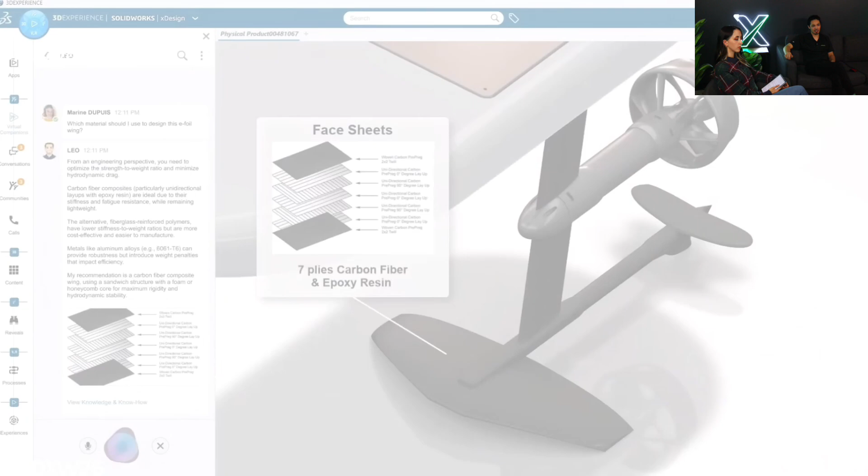Whereas if you ask Leo the same question, what material I should use for this design, he'll give you the engineering reason why carbon fiber might be the ideal choice here. And then let's take a look at what Marie would say. Well, she might give you a suggestion based on the different material science perspective, right? So once again, the regulatory and the science background.

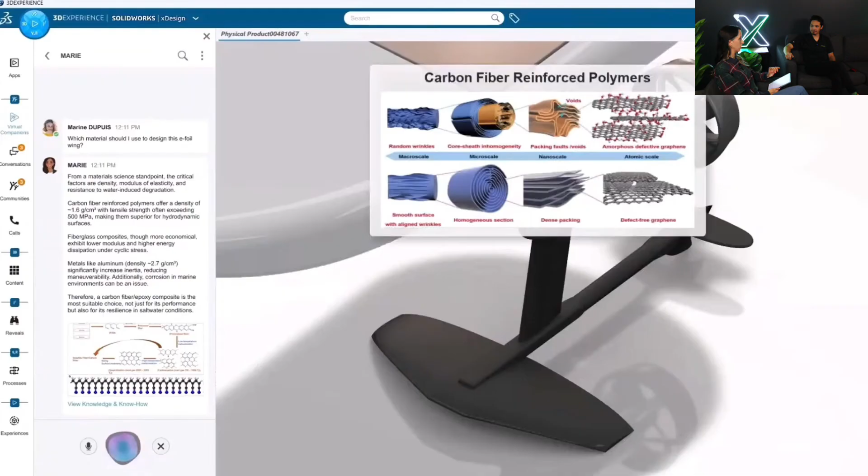Okay, that's interesting. So they all have a very specific role. Exactly, yeah. So we were actually very lucky at 3DEXPERIENCE World 2026. We had the opportunity to watch a live demo of Leo. So I absolutely have to share that with you guys here because just this 2-minute clip is very impressive. So let's give that a shot.

Leo, could you please create a sketch from this drawing? Okay, so first one, I have it in my clipboard. I have a drawing. Can you extract sketches out of it? And by the way, I pasted it very fast, so some people will say that this is a video, so I'm deleting text, okay, out of it, right?

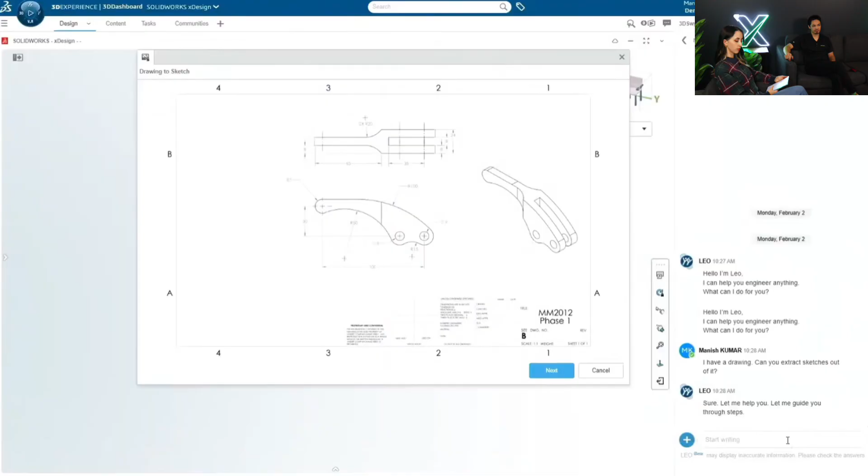And I am pressing enter. Because yesterday while I was doing it, some people were confused. So here, it asks me that, sure, let me help you, let me guide you through steps. And it pops up something called drawing to sketch, select a PDF file. Okay, so let's try to select a PDF file. So in ModelMania, as you know, you have to have a PDF file that we give you, and then you have to use that in order to create the model.

So here, you can see that what AI is doing here is that it is looking at that PDF file, and it is providing segments that it wants to keep as sketches, segments that should not really be sketches. So there is a title block, there is an isometric view that it shouldn't really keep as sketches. So it is discarding it.

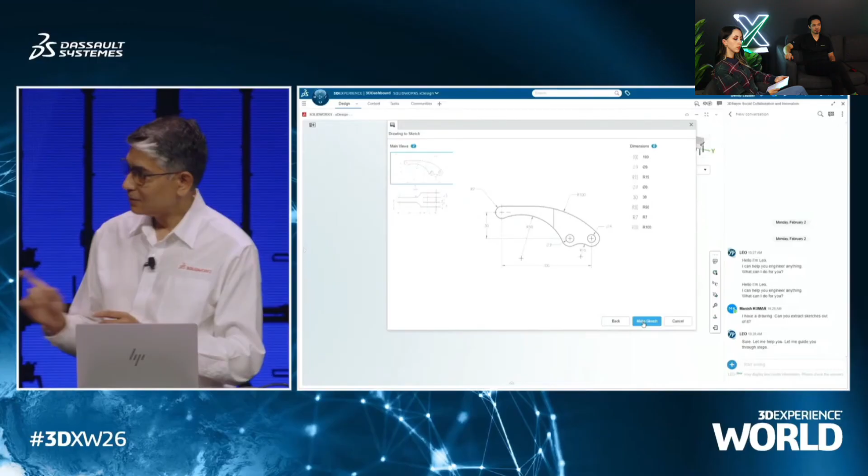Not only that, Pascal, it read every single dimension. So this is also done by AI. You mean all the dimensions? All the dimensions, and I can even modify it if I want. You see, these dimensions are editable. But here, for the sake of time, let me just try to create a sketch. So I was able to go from a drawing to a sketch like this. Wow.

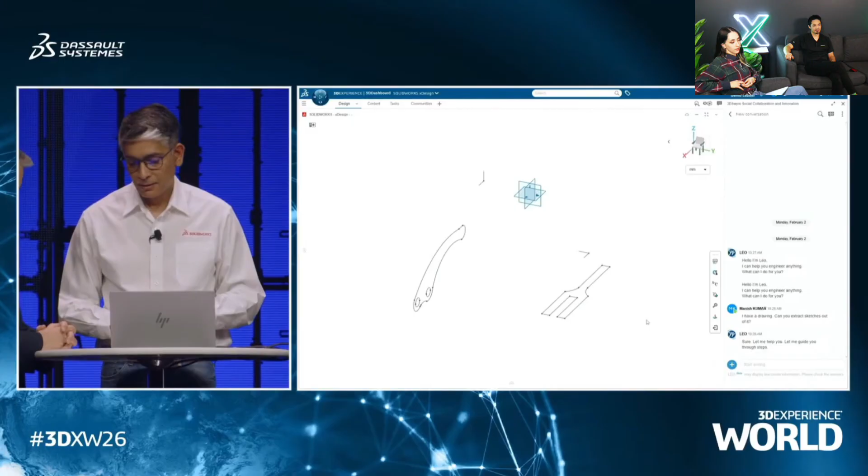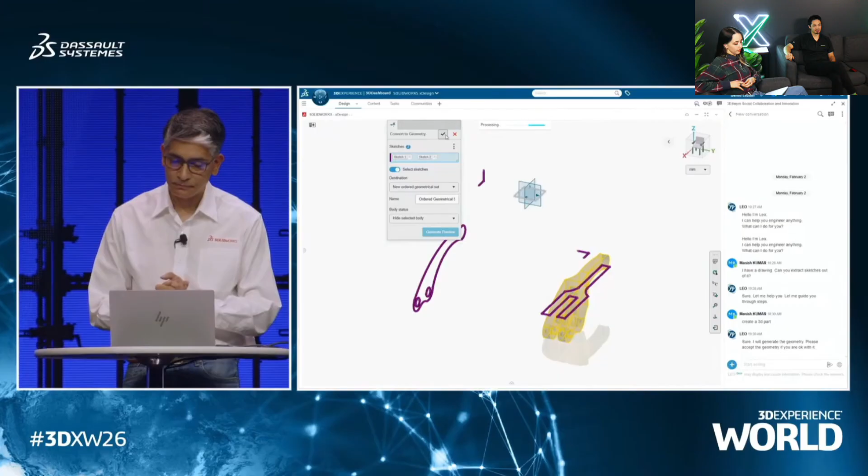Now, what about the 3D parts? You want more? Yes. So create a 3D part. Now let's see what it does. Actually, what it will do is that it will identify the sketches and it will know how to create a 3D part out of those sketches. Soon enough, it will show me a preview of the model that I need to have. And once the preview is shown, I'll hit OK, I accept it, and there you go, you have the 3D model. There. Whoa.

Yeah, I mean, that's it, right? Very impressive. So this gives you an idea of sort of what's to come, right? With the engineer in the driver's seat, AI became a tool that made designing feel frictionless. So this is not a sort of magic design button. It's about removing friction, as you said, improving context, and mostly supporting engineering decisions. It's not replacing expertise, it's just enhancing it, which is great.

That's exactly right. So one thing that we noticed as Solidxperts was how grounding that messaging actually felt. Right? It's not about blowing up existing workflows. It's really about strengthening what engineers are already doing on their day-to-day. So if we were to sum up day one in a core message here, I would go with: AI is the engine, you are the driver. So once again, AI works with engineers, not instead of them.

So that sort of brings us into day two, which was more about partnerships and what AI looks like today in practice. So the tools that we have at our disposal today, let's take a look at another clip.

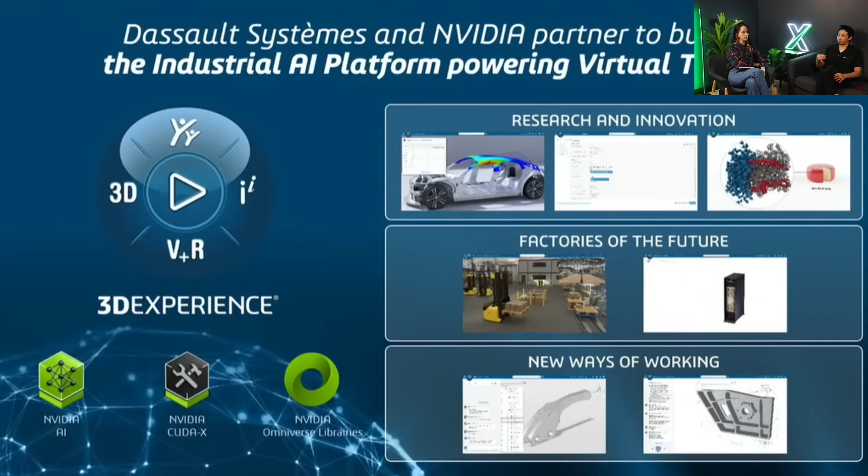So imagine the scale of the simulation that we're talking about here. It's really the capability of simulating an AI factory that's going to be possible with NVIDIA GPUs combined with the 3DEXPERIENCE platform.

I mean, it all sounds great, but the key question for me is, where does AI actually show up inside a real workflow? Not in a staged demo, but in your daily engineering work, for example.

Yeah, so today we have AIs integrated in SOLIDWORKS that assist us in multiple practical ways. I'm going to call them AIs, but they're really just things like automated feature recognition, suggestions for optimal design configuration based on prior models, or even predictive simulation guidance. These are all things that exist today, and they're more like AI assistants. They are not autonomous on their own.

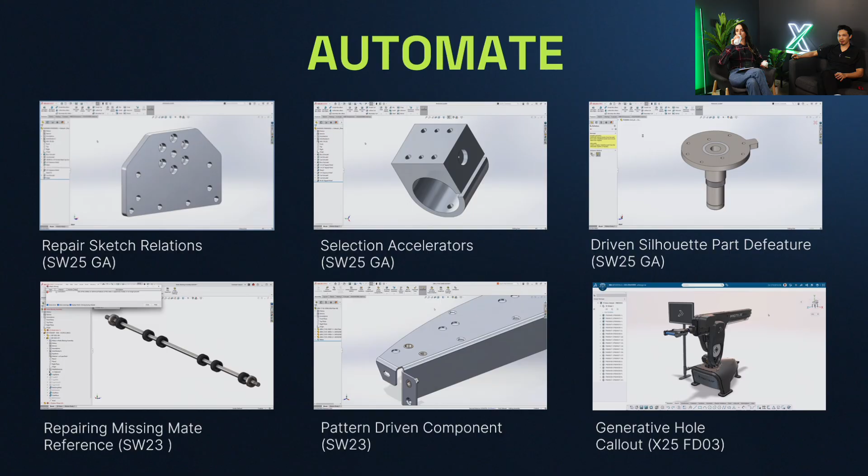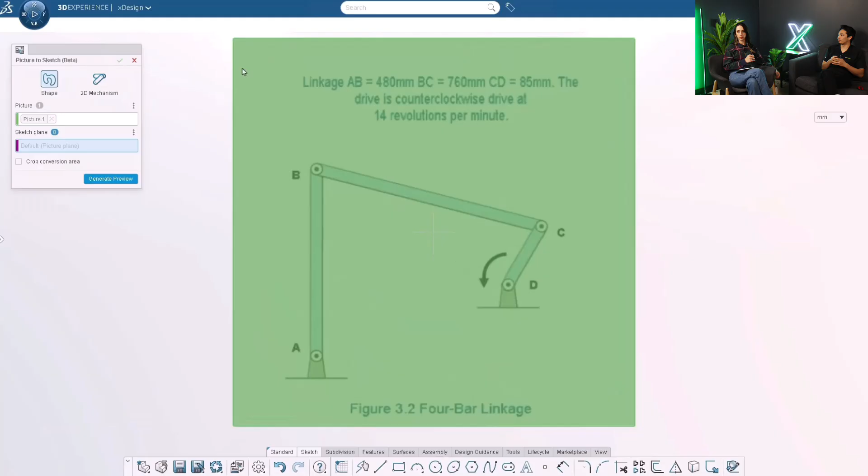I'll present those really quickly. The first one, that I think is really cool and something I wish I had as a student, is the ability to take an image of a mechanism, just a picture, and have it become usable design data. Imagine you have this image from a school textbook of a mechanism, and you want to create that in 3D in a modeling software. Now you can just grab that picture, import it into your design environment, and right from there create a mechanism with all the right constraints. So from idea on paper to a functional sketch online in seconds.

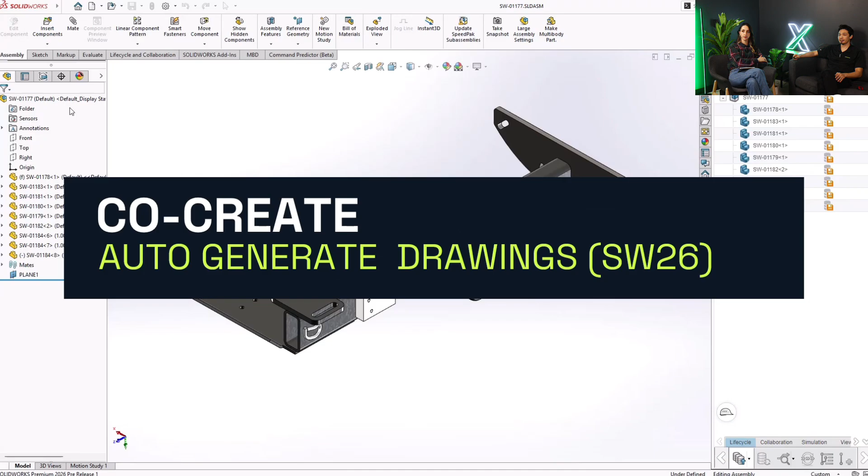The second one I really enjoy, something we should definitely take advantage of today, is the ability to auto-generate drawings. Generative AI takes the pain out of creating your detailed drawings in SolidWorks, automatically generating and detailing your new drawings. Imagine your dimensions, your tolerances, your callouts for features, all included in a drawing that's automatically generated by an AI assistant in SolidWorks.

So we are not replacing CAD, we're just making it stronger. AI becomes another tool in the toolbox we already have, alongside experience, intuition, and engineering judgment. Tools get smarter with time, but engineers stay firmly in control, and I think that's an important distinction.

Yeah, for sure. So the big message for day 2 is to build on the foundation that you already have. Take advantage of SolidWorks with cloud services because it is your gateway to the future. All of the AI we'll have in the future is going to be on the 3DEXPERIENCE platform, and you're going to need SolidWorks with cloud services to gain that access. So if day 1 was a teaser of what's to come, day 2's big message is a reminder of everything you can already do with AI today.

So that brings us to day 3, which was really all about community.

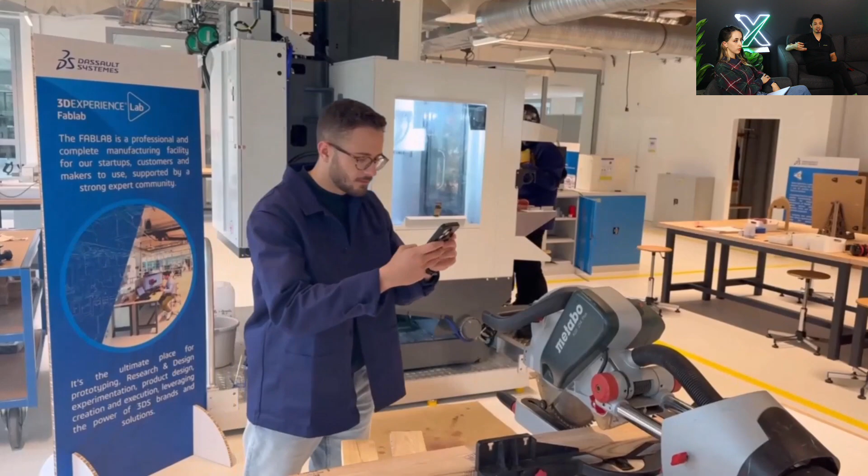Don't worry though, SolidWorks isn't going anywhere. It's just evolving into a more connected, smarter, and easier to adopt tool. So once again, I'm going to steal some slides from our last presentation just to give you an idea of what's coming. So imagine you need a 3D model of a part, like a handle for your assembly.

With just a picture, AI will be able to generate a precise virtual twin in seconds. And then this model will come in simulation ready, which will allow AI to run even further tests under your real-world stresses, your real-world conditions. So your performance is being validated right away.

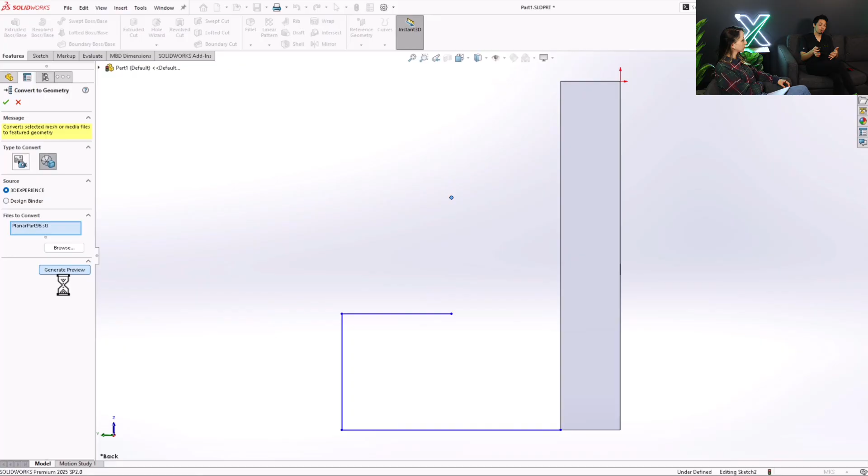Not only that, picture to mesh is a very powerful tool that is existing today, but what if you needed to take that mesh further? Well, in the future, what we'll have is something called Mesh to 3D, which will take those static meshes and make them fully editable parametric models.

So whether it's from a scan or an import or old legacy data, AI can open a direct path from that complex geometry to features that you'll be able to refine, reuse, and evolve. So we're exploring multiple approaches, and you can see here one of those results.

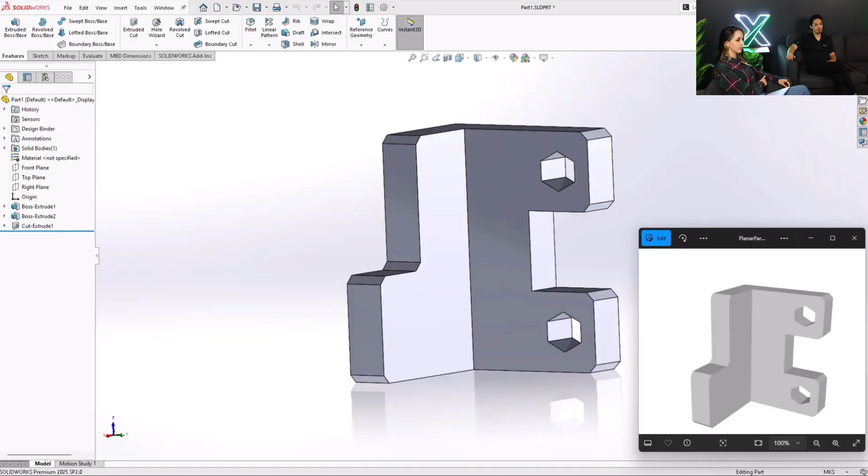Now imagine that you're moving from a 3D part into sketching some new ideas. You already have the part and you want to add on top of that. Well, instead of painstakingly constraining every line in a sketch, once again, generative AI steps in. They'll be able to help you stack your dimensions, recognize existing features, and ask you if you want to recreate those. So keeping your design intent intact while you're focusing on being creative, being innovative.

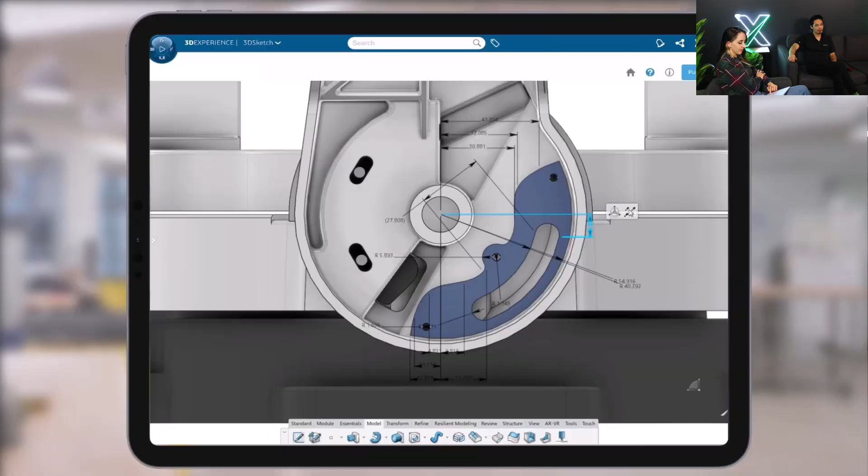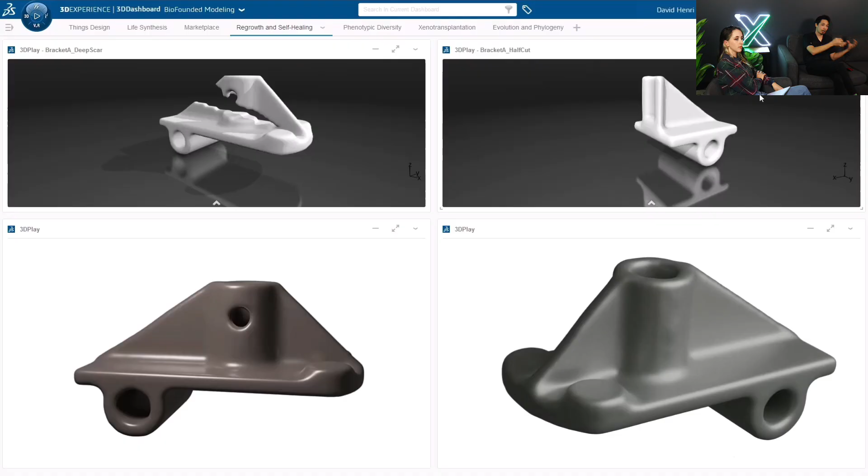This one speaks a lot to people that work with scanning, right? So if you do any scanning or importing of parts, they often come in incomplete, maybe with some gaps or missing features. Well, AI in the future will act like a self-healing material for our geometry, automatically recognizing patterns and rebuilding those missing areas that didn't come in with your scan. So AI helping you restore your design intent in this case.

If you do any sort of manufacturing, in the future, NC programming will become fully generative. AI won't just automate your toolpath creation, it's going to explore alternate strategies, different ways, maybe balancing your speed and your quality, and continuously learning from past jobs.

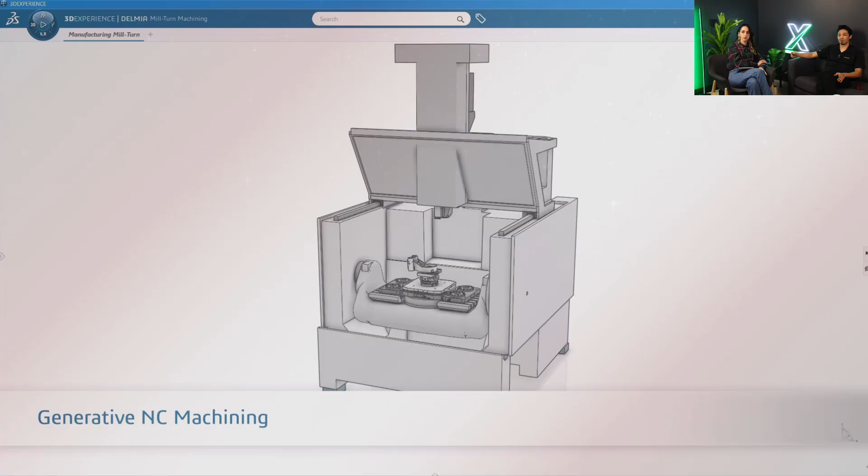Let's say you're a graphic designer, for example. You can actually accelerate those rendering workflows in SolidWorks in the future. So imagine you have a camper van and you want to see what it looks like in real life. Just ask your AI chatbot in the SolidWorks interface, hey, can you render this and tell me what it looks like in real life, basically? Wow. So the future of visualization is with AI.

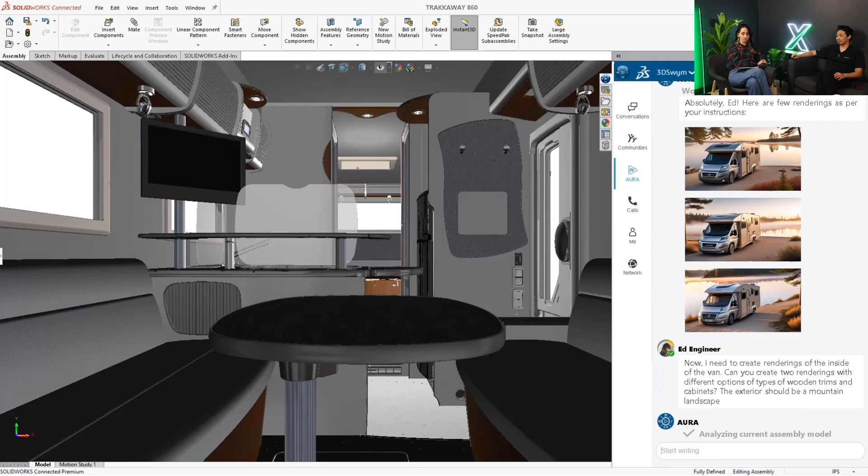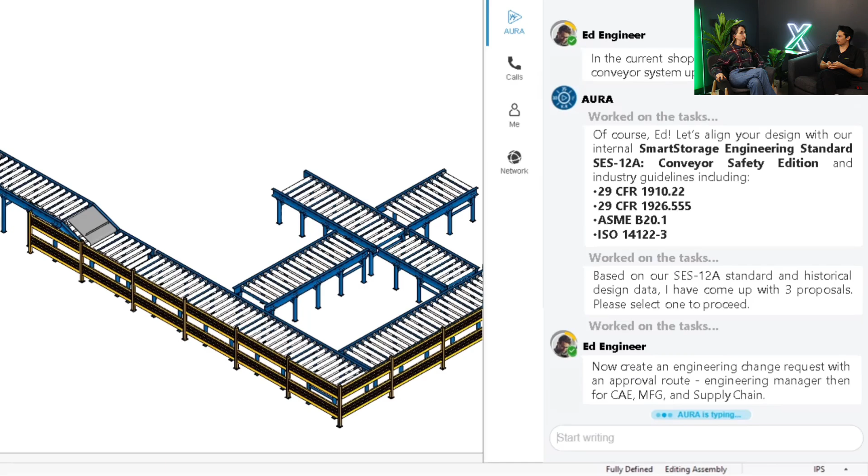And then this last clip I want to show you, we already know about Aura. Aura already knows about our models, right? It understands our models in context, and they're able to give us some deeper answers, even maybe providing design options or different configurations based on all of the knowledge that we've given it. So once again, AI-assisted workflow with a co-pilot, sort of.

Okay, so what I take from day 3 is that technology evolves, but the real investment is still in people. So tools matter, but skills matter more, thankfully. Yes, thankfully.

Okay, let's bring this home. I am going to cosplay as a SolidWorks user watching this today and ask questions about what I should actually take away. So I'm going to rapid fire this, okay? Perfect. Okay, first question. What's the biggest misconception about AI coming out of this event?

I would say the biggest misconception is definitely that AI is supposed to be a replacement for engineers. It's not. It will not be. These assistants we've talked about today are really designed to enhance your decision making, reduce your repetitive work, and give you actionable insights. Once again, you're still responsible for the final design as the engineer. We're thinking assistive, not autonomous. Engineers are always going to remain accountable.

Okay. Second question. Does cloud mean all in or nothing? Is desktop SolidWorks going away? That's a really good one. I know there are a lot of fears out there. People are scared they're going to lose their SolidWorks. It's not happening. So my answer to that is, not at all.

Dassault is actually encouraging a hybrid approach. Desktop SolidWorks will always remain fully supported. The cloud just adds some flexibility on top of that - easier collaboration, remote access, and integrated simulation, without forcing your teams to abandon the tools they're already relying on. So in terms of direction, we're talking hybrid with flexible adoption of the cloud, with desktop being very much still here. Okay. Third question. If teams want to prepare smartly for 2026 and beyond, what should they invest in?